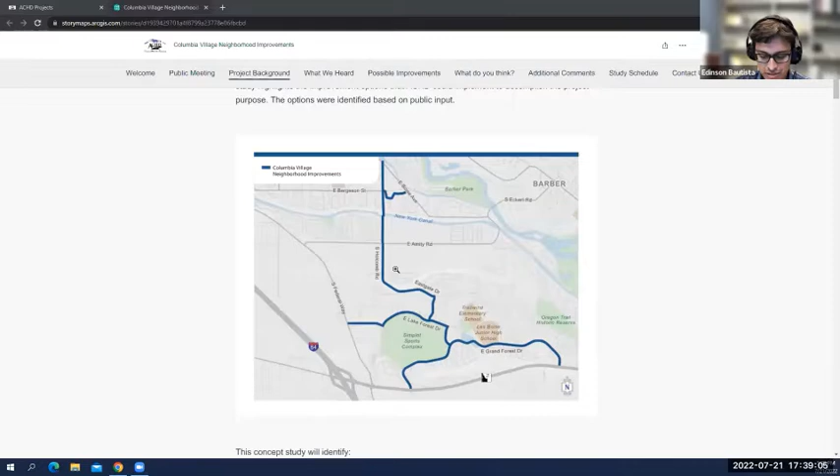Through this concept study, we seek to engage with the community through a robust public outreach to identify those bicycle and pedestrian needs and improvements that align with the neighborhood vision, as well as ACHD's continued effort to support the cycling and walking community and support them as a viable mode of transportation.

These improvements include, but are not limited to, sharrow lane markings, bike lane, sidewalk, curb ramps, pedestrian crossing, intersection improvements, and pathway improvements.

All these improvements will aim to emphasize the Holcomb and Columbia Village as a bicycle-friendly corridor, as well as meet Americans with Disabilities Act standards and current pedestrian standards. Overall, this is an effort to complete the bicycle and pedestrian network.

Scrolling a little bit down to the next section, entering into the what we heard from the community section. Here we present a summary of the first public outreach that we conducted for this project. This was done back in March 2022, and it was open for 2 weeks, in which we received a total of 321 comments from 92 participants.

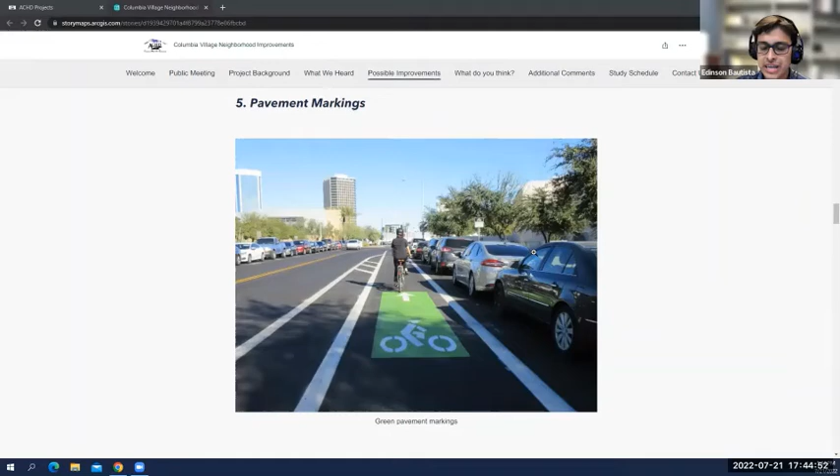The other improvement we're exploring through this concept study is additional pavement marking consideration. This includes components like green paint, shown in this image. That's something ACHD is exploring to implement more widely within Ada County.

And finally, entering into the shared use pathway. These are improvements to pathways that are outside the street. Typically they're 10 feet wide and allow mixed use by pedestrians and cyclists along the route. They're typically paved with asphalt or concrete, so that's something we're envisioning for this project as well.

And now jumping into the concept design for comments, I'll give the time to Brent to provide more details on what we're proposing and information regarding this concept study. I will stop sharing my screen now to give it to Brent.

Great, thank you, Edinson. Let me share my screen here. Okay, so the story map, if you're able to see this, but I'm going to navigate using a PDF, just helps me to be able to zoom in and out a little bit more.

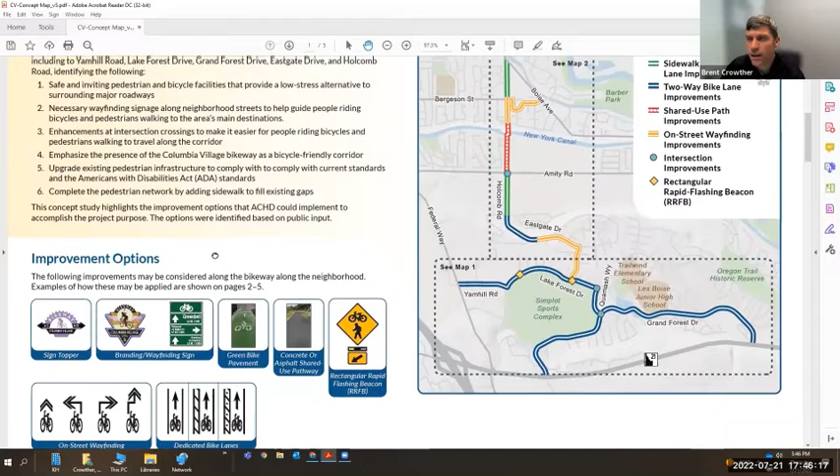Edinson reviewed some of the potential concepts being considered within the study limits. What we've done now is demonstrate with this very conceptual exhibit how those concepts would be applied to these roadways. You can see here on the right a map of the study area.

Then you can see the legend items: we have the green dash for sidewalk and bike lane improvements, a blue dash for two-way bike lane improvements, red for shared use path improvements, orange for on-street wayfinding, the blue dot for intersection improvements, and the yellow diamond for rectangular rapid flashing beacons. We've applied that beginning up here at the north at Boise Avenue.

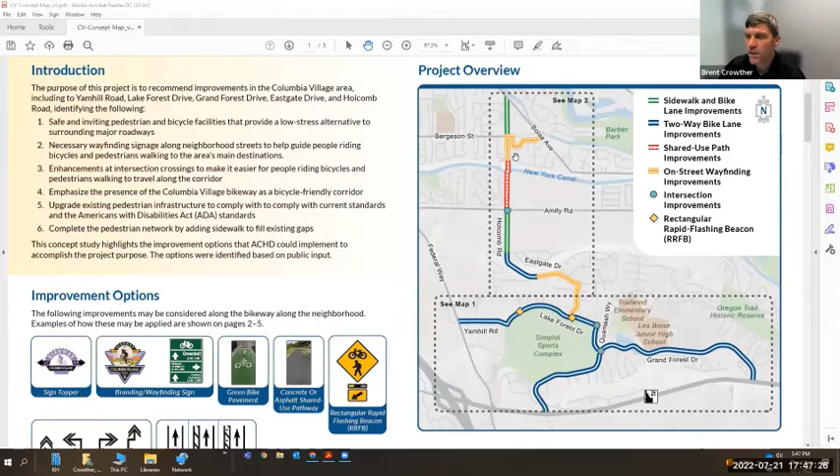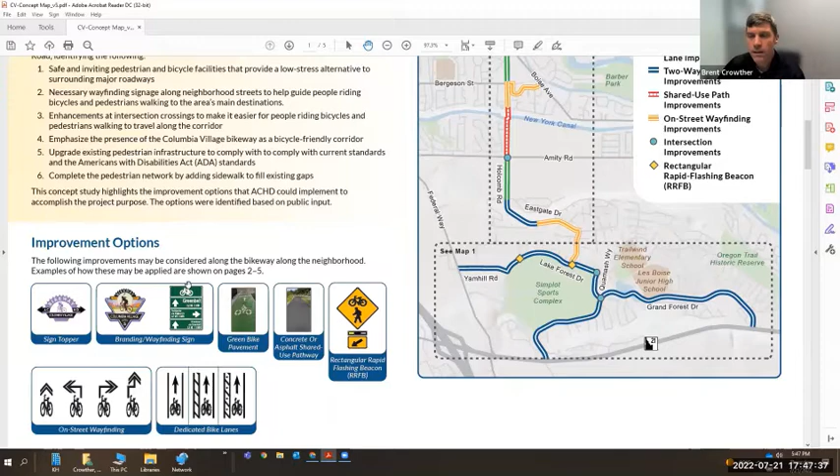We're proposing to improve the sidewalk currently so that we provide sidewalks on both sides of the street. Then in this area between Bergeson, connecting over to Boise, down to near the canal, we're proposing on-street wayfinding improvements. You can see an example of on-street wayfinding - signs like this with the branding, the green signs, as well as the sign toppers.

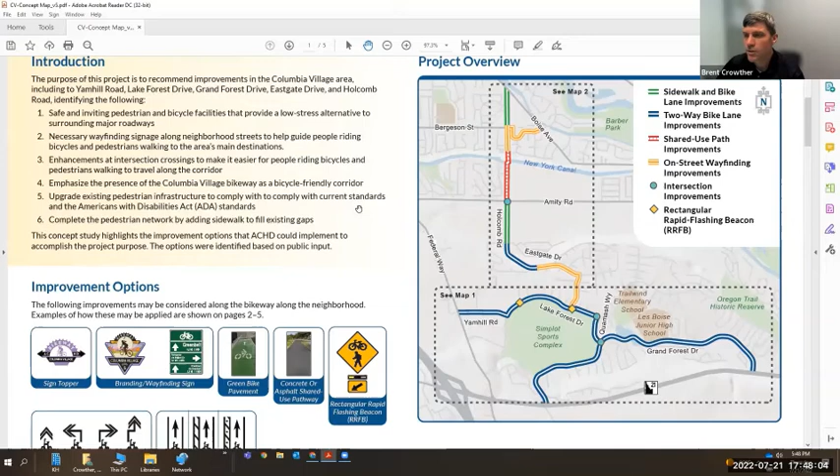As we extend further down, crossing the New York Canal down to Amity Road, we're proposing a shared use path. Again, we have sidewalk and bike lane improvements, two-way bike lane improvements, on-street wayfinding, and for the duration, two-way bike lane improvements. I'll show you on the next page a little bit more in depth of those improvements.

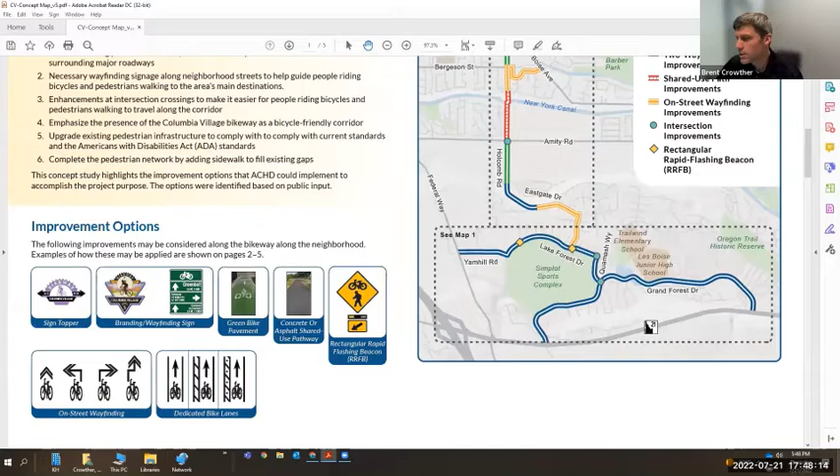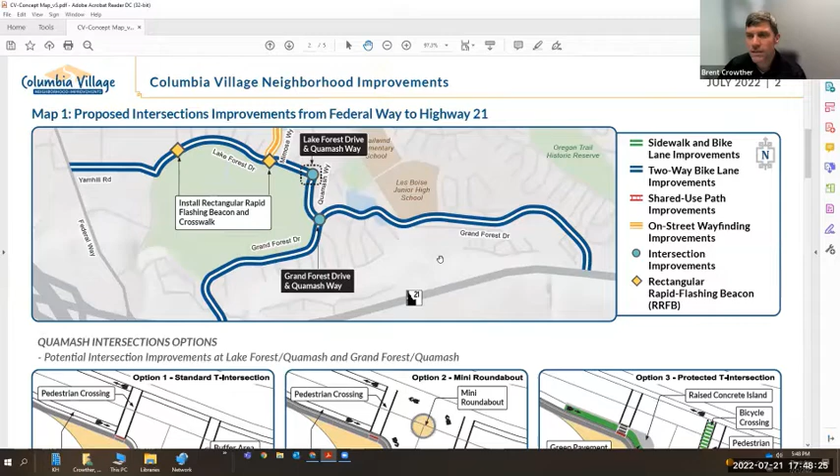It's hiding my... how do I get to the next page here? Okay, there we go. So the other four pages have inset maps that show a bit more detail on the specific type of improvements, and then a detailed exhibit for selected locations. Here, map number 1 shows improvements from Federal Way to Highway 21.

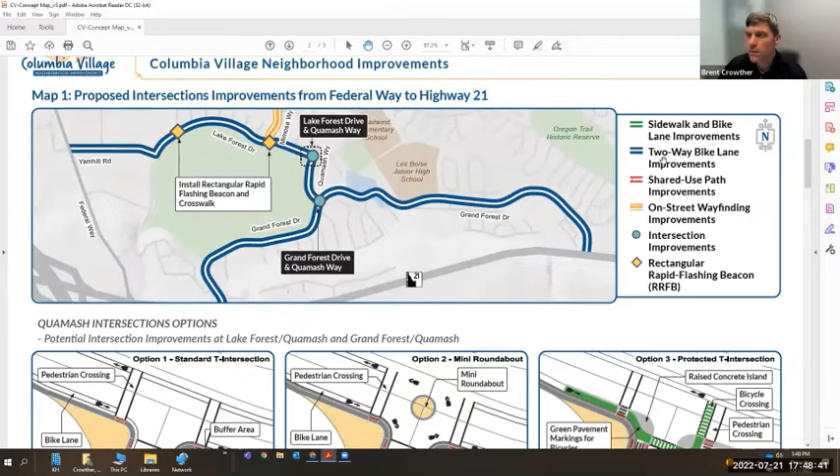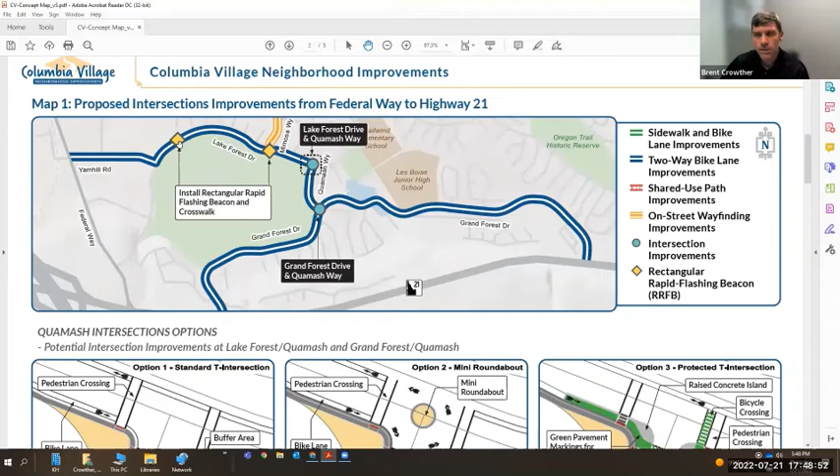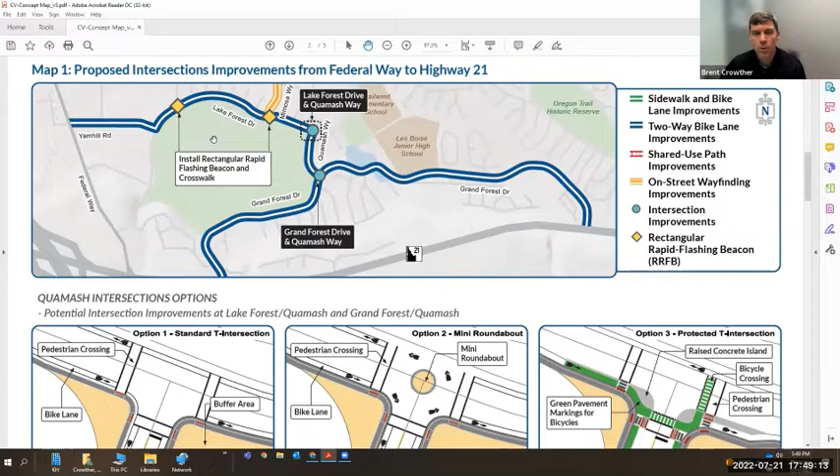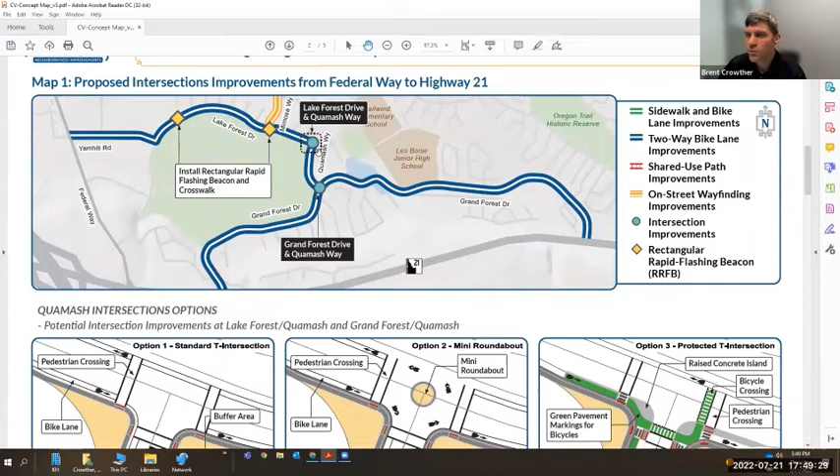Here at the intersection of Lake Forest Drive and Quamash Way, you can see we have intersection improvements. If we look down below, we have a couple of different concepts that can be considered, and we'd like your input on them.

Option 1 is a standard T intersection. We're proposing to modify the intersection to remove the large sweeping radius high-speed curves to more of a traditional T intersection. You can see we're implementing a buffer area to utilize some of that pavement so that we slow vehicles and better define the vehicle path, making a more defined location for pedestrian crossings. We'd have pedestrian crossings on all legs of the intersection, and bike lanes on all legs as well.

Option 2 in this location would be what we call a mini roundabout. That would direct vehicles and provide traffic calming, with vehicles circling around the roundabout to be able to make the movement to go left or right.

Again, showing the bike lanes with the buffer areas to use up some of that large pavement area. And the third option is what we call a protected T intersection.

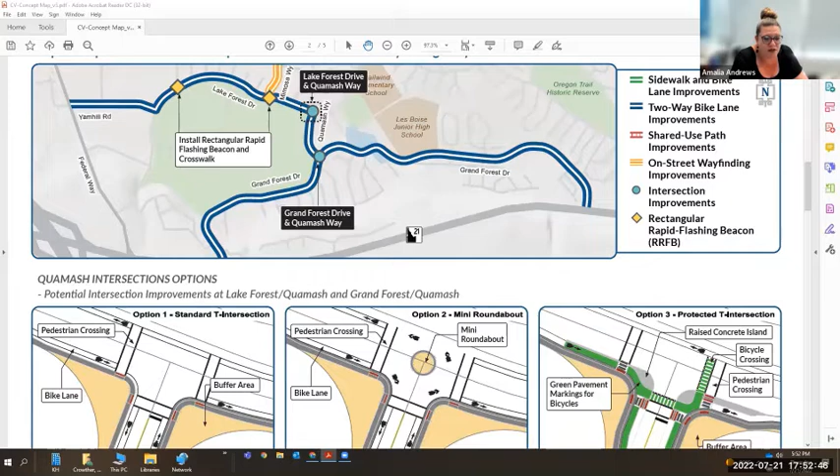Just one second and it should pop up on your screen. So I see that a poll has popped up on my screen and it's asking us a couple of questions pertaining to map 1. Which option would you prefer for Grand Forest Drive and Quamash Way intersection?

And then question 2 pertaining to this same poll is which option would you prefer for Lake Forest and Quamash intersection? Will you be sharing these poll results during the meeting?

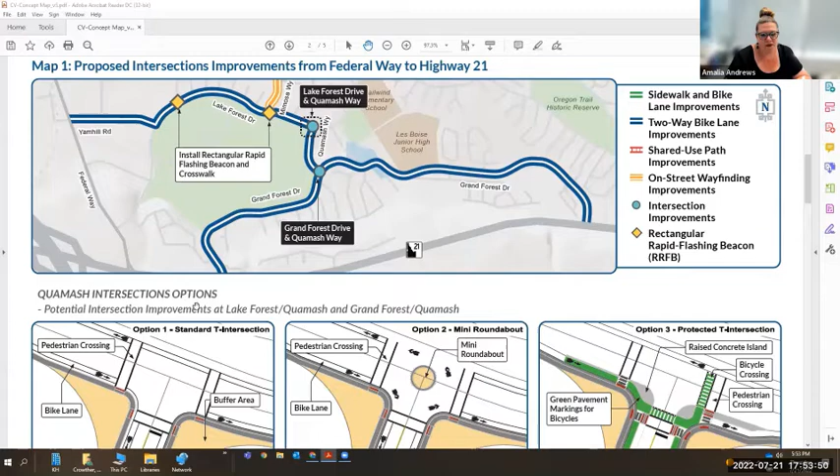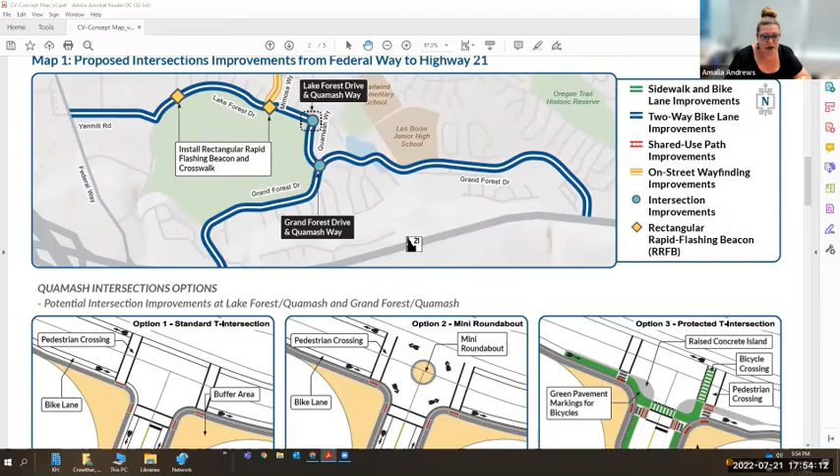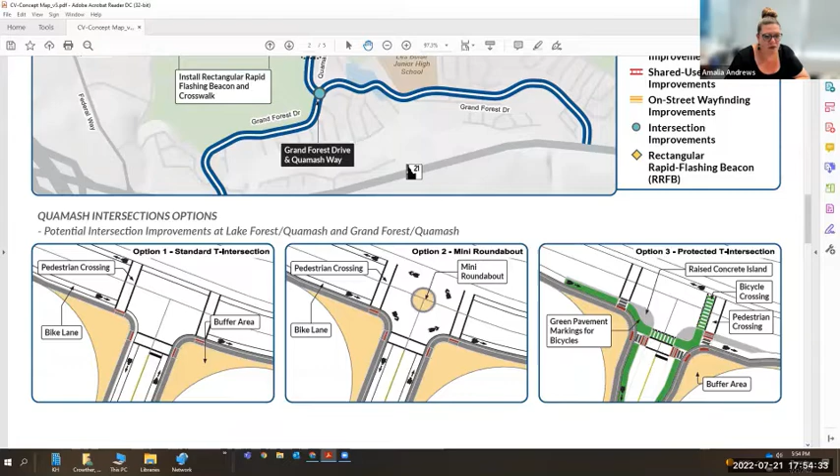Thank you, Brent. Okay, I think we can go ahead and move into map number 2. Map number 2 shows proposed bikeway and pedestrian improvements from Federal Way here on my left to Highway 21 here on my right. Through this section, it's the same section we saw in map 1, but showing a little bit more illustration on what the bike lane improvements may look like.

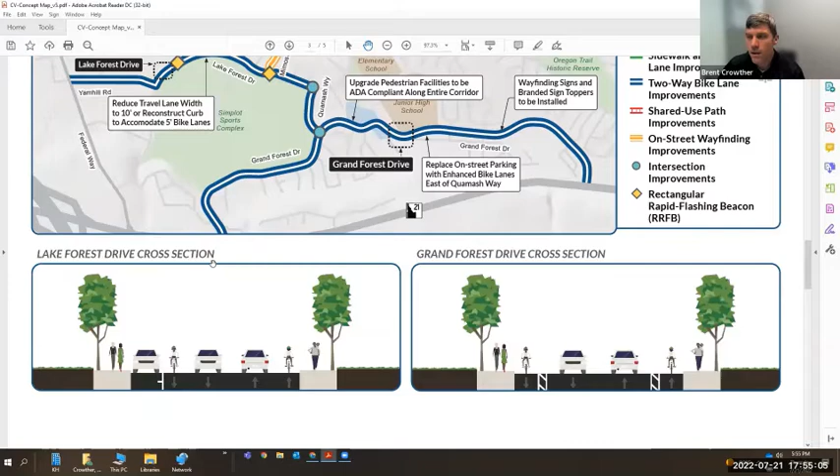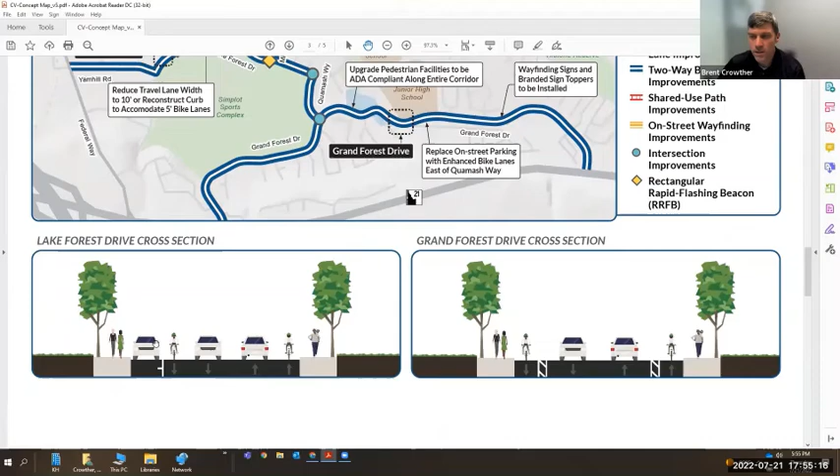You can see here the Lake Forest Drive section would have a bike lane on both sides of the road with a parking area on one side of the road. And that would be the Lake Forest Drive section along here where my mouse is.

The Grand Forest Drive cross section would have a bike lane on both sides of the road, separated by a buffer area, separating the travel lane from the bike lane. And that would be on both sides of Grand Forest Drive.

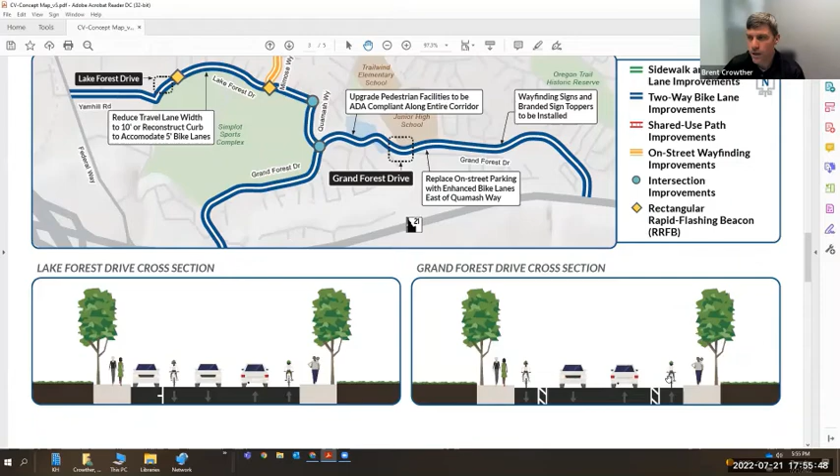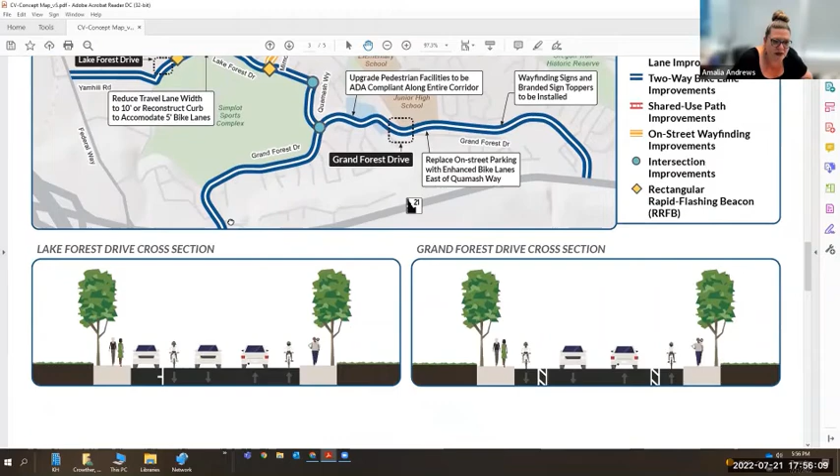Okay, so the polling question should have shown up on your screen for map 2. The first question is, do you like the proposed improvements for Lake Forest Drive between Yamhill Road and Quamash Way, yes or no? And question 2 regarding map 2: do you like the proposed improvements for Grand Forest Drive east of Quamash Way between Highway 21 and Quamash Way? We'll wait just a short time for you to answer yes or no to those two questions pertaining to map 2.

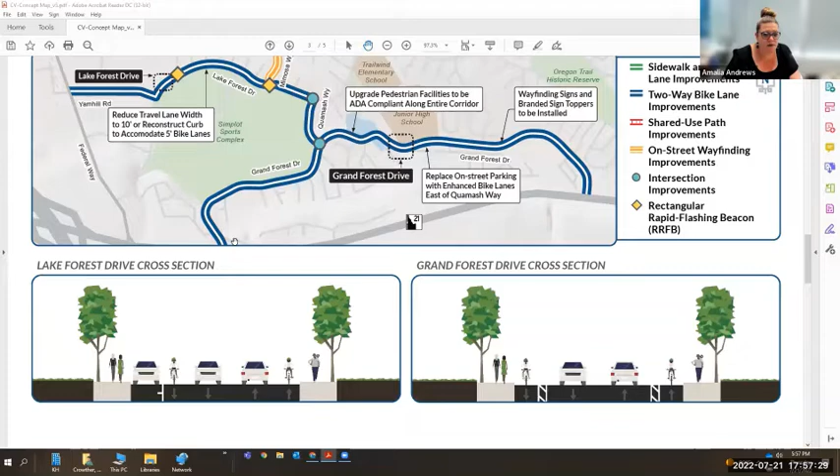It looks like most of you chose yes for both question 1 and question 2. There were a few no's, but mostly yeses on those two questions. All right, now we'll exit out of that and move into map 3.

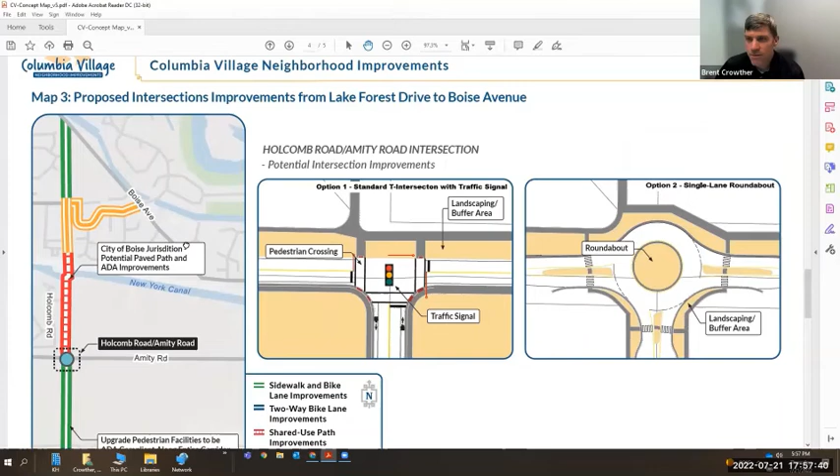Map 3 is showing the proposed intersection improvements from Lake Forest Drive to Boise Avenue, as you can see in this map on the left. We have a couple of options to get your input on here at the Holcomb Road, Amity Road intersection.

Option 1 is a standard T intersection with a traffic signal to facilitate crossing of Amity Road. You can see that illustrated here, where we'd have a traffic signal and the crosswalks.

Option 2 is to construct a roundabout at the intersection of Amity Road and Holcomb Road, as illustrated here on the right. That would be a single lane roundabout with landscaping and buffer area.

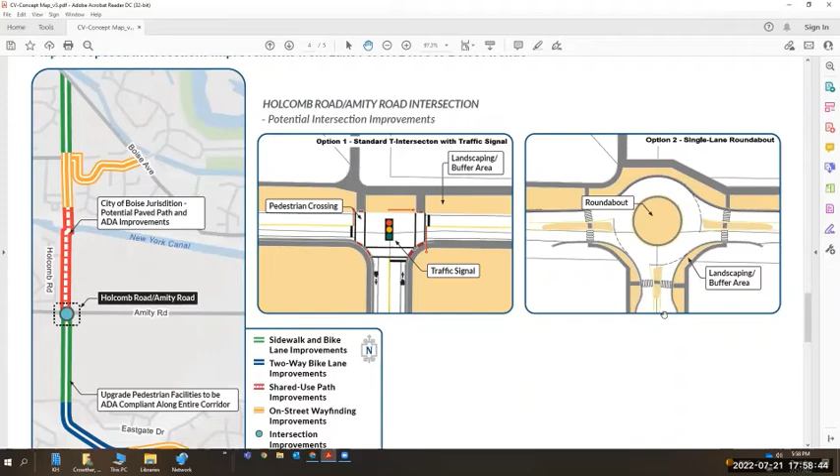A vehicle entering, if they wanted to make a left turn, would enter from the bottom, circle the roundabout, and then exit to the left. A vehicle wanting to go through from the left to the right would enter the roundabout, follow through, and continue on their way.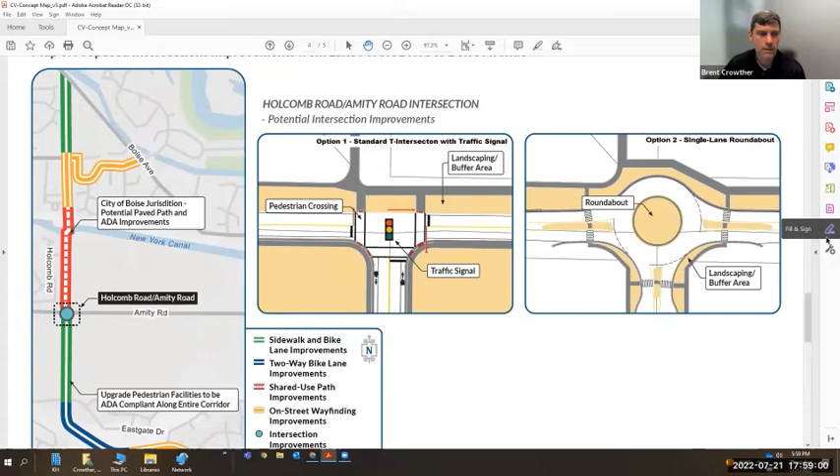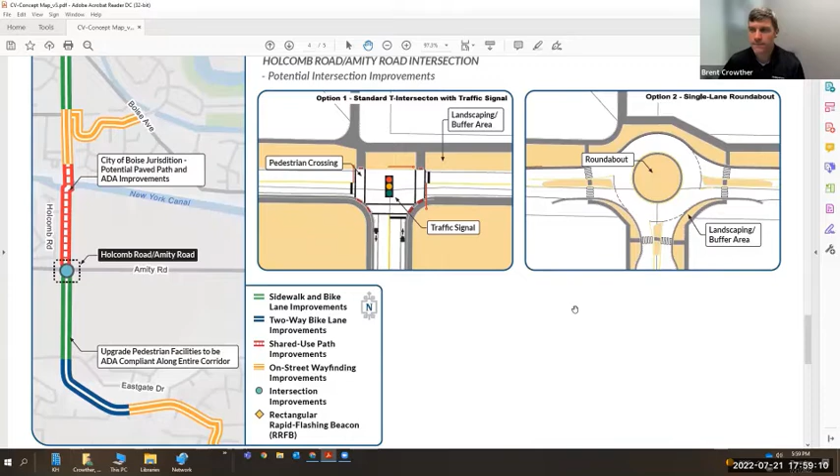For map 3, we have one question: which option would you prefer for the Holcomb Road and Amity Road intersection? Option 1, option 2, or I don't like any of these options.

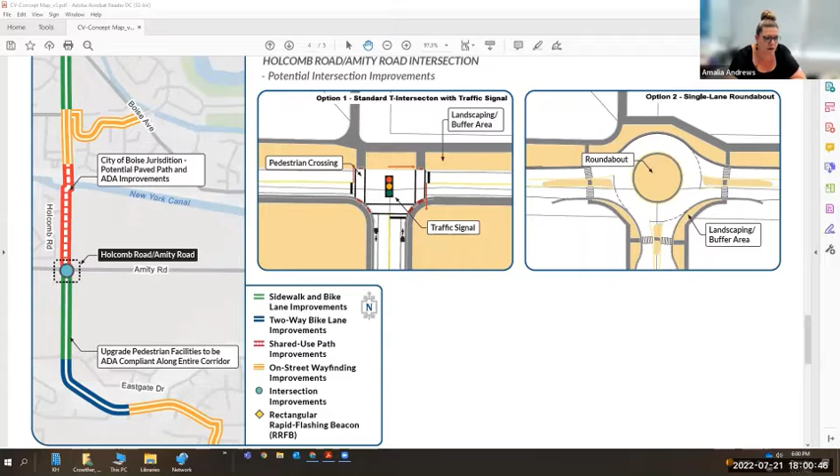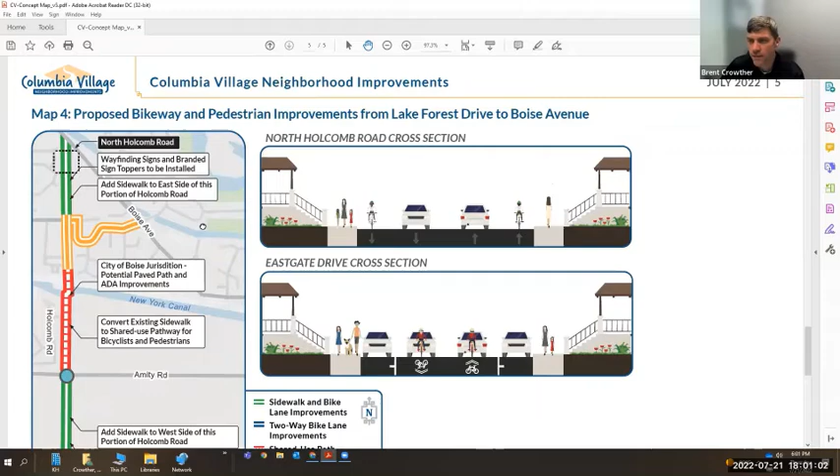Okay Brent, let's move on to the next map. Map number 4 shows the cross section of that same area for proposed bikeway and pedestrian improvements from Lake Forest Drive to Boise Avenue. In the North Holcomb Road cross section, in this area, we would have two travel lanes with bike lanes on both sides of the road.

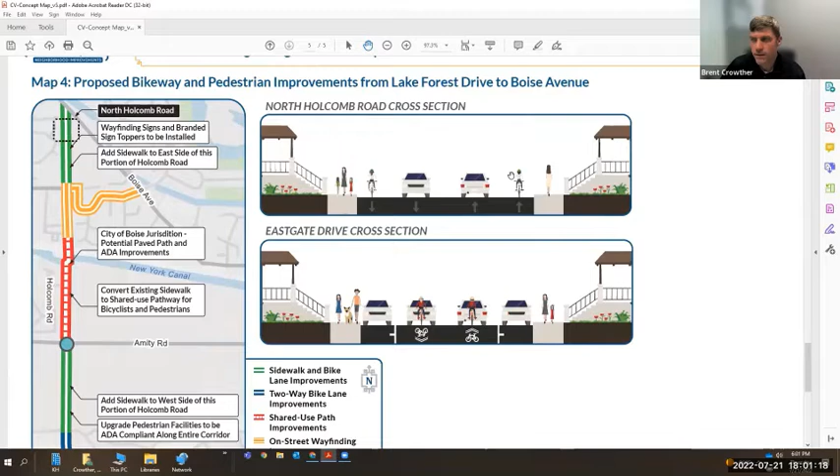For Eastgate Drive down here, because of the narrower cross section, we are suggesting what we call shared lane markings, which would be wayfinding adjacent to the on-street parking. Because of the narrower street width, there would not be room for dedicated bike lanes through this section.

Okay, are we ready to start the poll, Brent? Yes. For map 4, there are two questions. Do you like the proposed improvements for Holcomb Road from Boise Avenue to the New York Canal? Yes or no? And question 2, do you like the proposed improvements for Holcomb Road between Amity Road and Eastgate Drive? Yes or no?

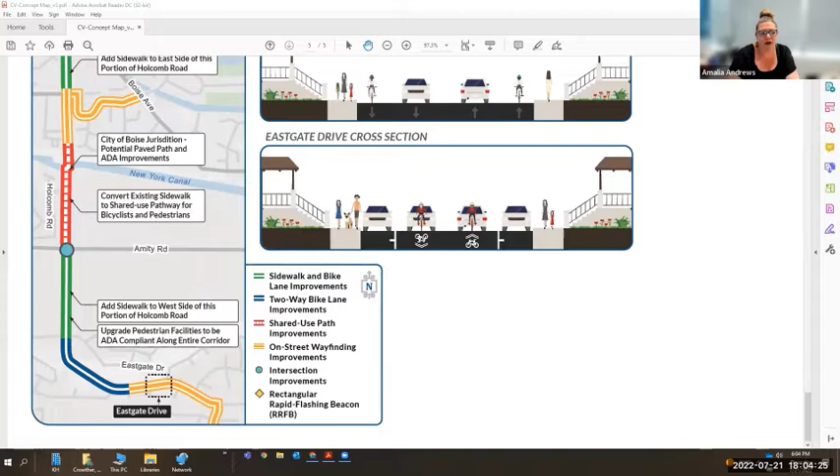Thank you very much for all of you participating. This is great, just answering those two questions.

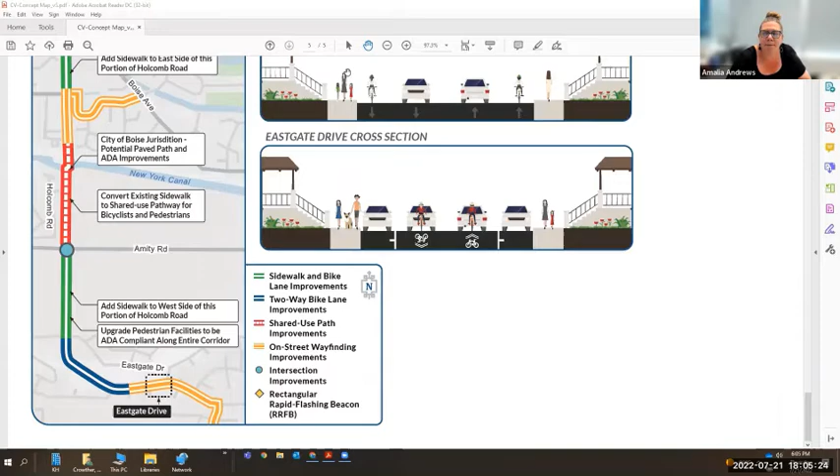And Edinson, did you have more details you wanted to share on the project website, or are we ready to move into questions? Yeah, let me start by sharing my screen once again, that way I can display this, the last part of the story map.

And then there's all the demographic and contact information that you can fill in, just to get even more information on the project in the future, or just to provide a public record for this project.

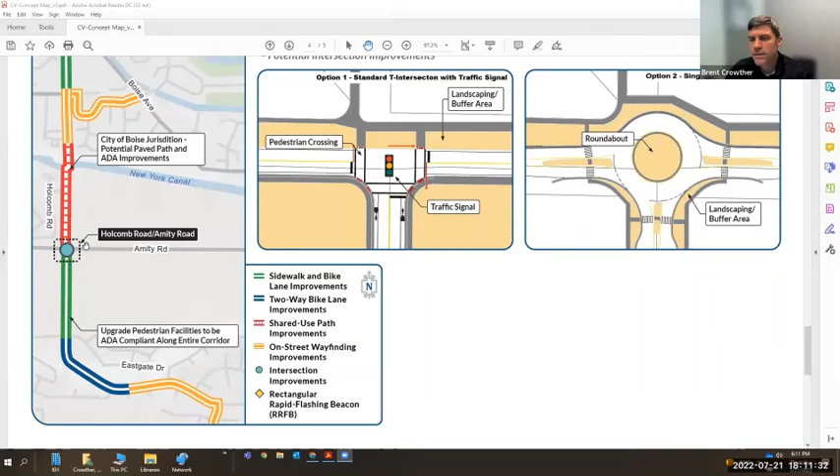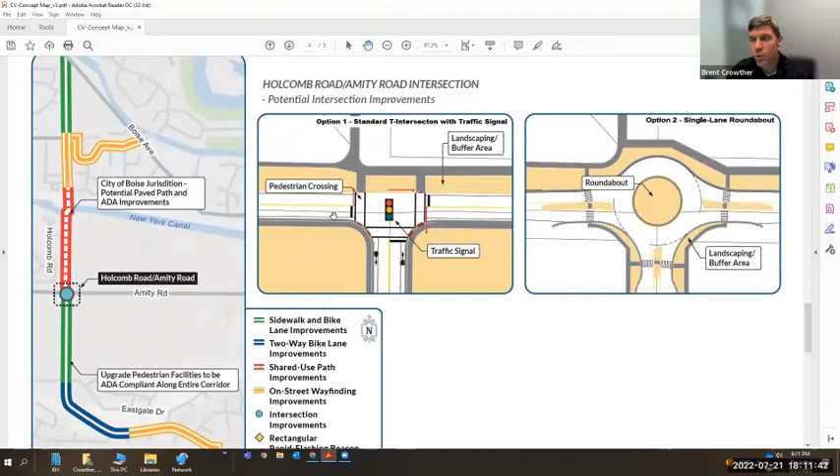Yes, I think as you mentioned, the question was submitted when we were talking about map 1. And then we got into it on map 3, where option 1 is a standard signalized intersection, and option 2 is a roundabout option. So do you think we answered the question, Linda? I see you shaking your head. Yes, that's okay, most helpful.

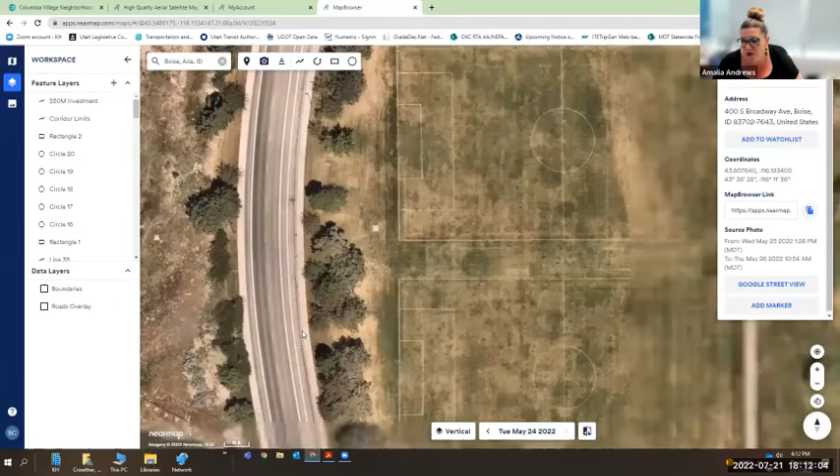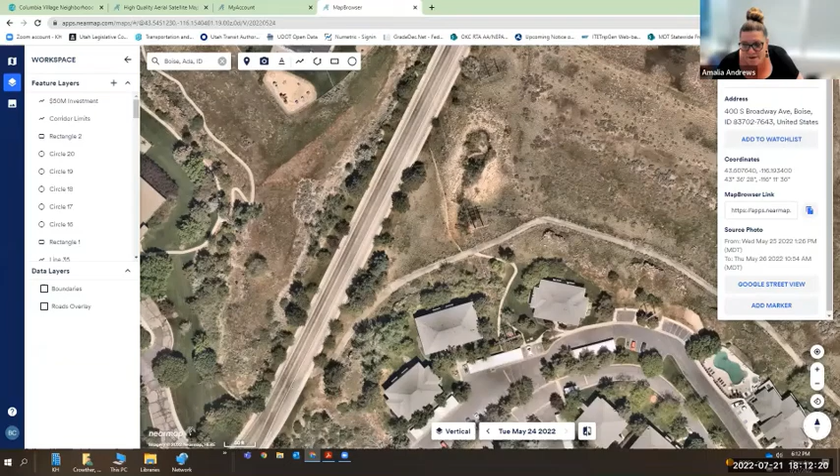Okay, great. Again, if any of our participants have a desire to ask a question verbally, you're more than welcome to do so, but I'm going to keep going through the questions in the chat. There's a concern from Philip about the Lake Forest section, regarding the amount of traffic the soccer fields get and folks parking along that street interfering with bike safety, such as when people open their car doors.

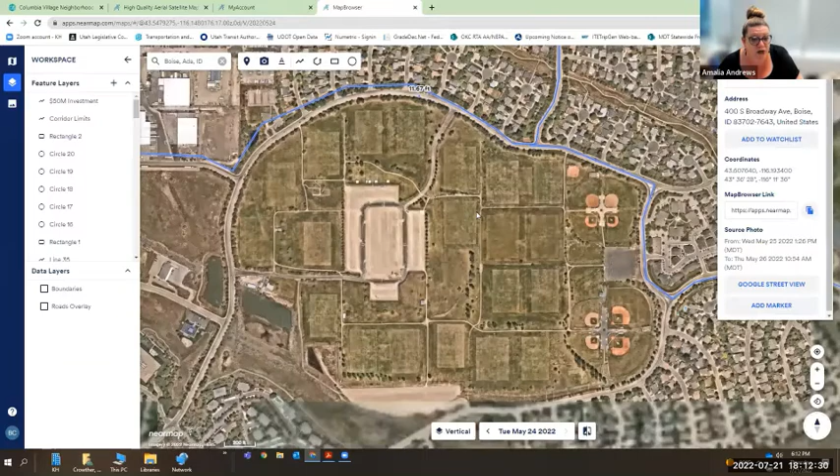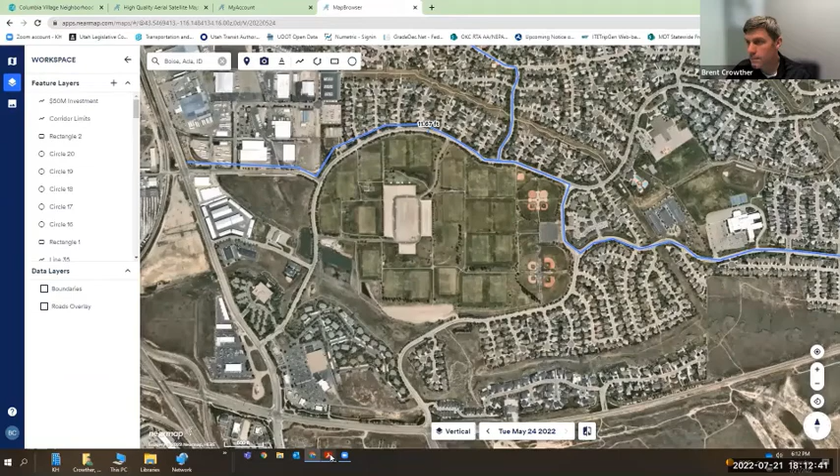Do you want to maybe pull up that area, Brent, near Lake Forest? Yes, so the soccer fields bring a lot of traffic in that area, so there's concern with that. I think we're talking about the north side. Philip, feel free to unmute your microphone if you'd like to share any more details.

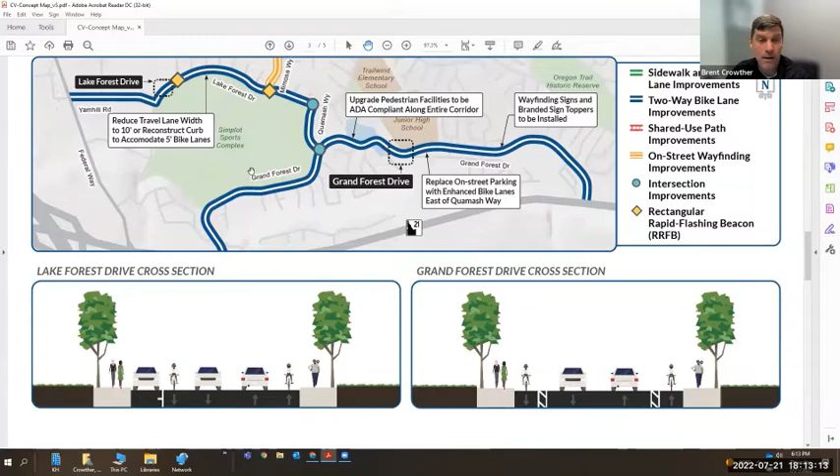Yeah, and we are recognizing that there is a big soccer draw, a field demand for parking. And that's why it's been suggested that we retain the parking and not remove it.

Yeah, hey, this is Phil. Thanks. Yeah, I don't know if there's any way to widen the street and make it diagonal pull-in parking, that might improve the situation, or I don't know how else to make it better. But currently, that cross-section drawing basically looks like what it currently is, and it just doesn't seem very safe when you're riding on that side of the street.

Are you specifically talking about Lake Forest, right? Yeah, you nailed the location. Yeah, and part of this, correct me Edinson if you want to clarify, but we've been trying to design the project within the current curb limits, so we don't end up in a full reconstruct type project, reconfiguring the space we do have. So we're trying to repurpose rather than reconstruct and widen the improvements, and that's why we haven't proposed any additional width there, but certainly noted.

We do have the bike lane. I think this is the cross section you're talking about, where we have the on-street parking on one side of the road, then the two drive lanes, and then the bike lane width. We are proposing a full width bike lane. Edinson, do you remember the dimensions on the bike lane? Was it a full 5? Yes, Brent, you're right. You're correct in all you say.

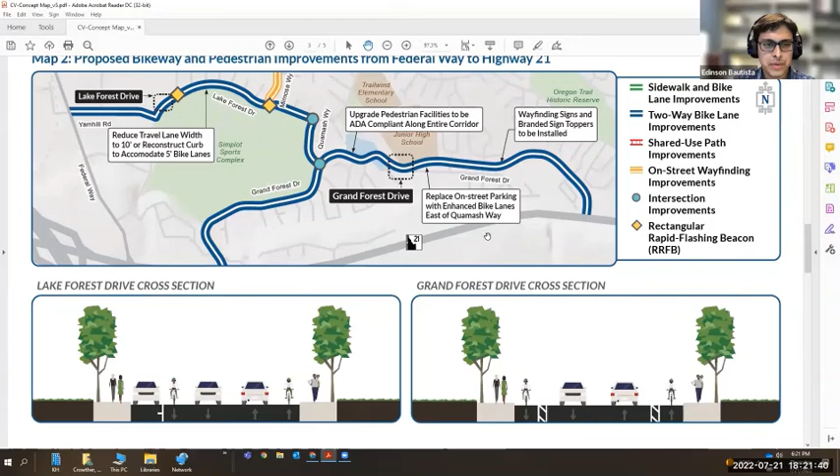Totally understood. At this moment that's not being evaluated as part of this project, but we saw a couple comments come in about that location that will be shared internally. It's just not part of this limit at this time. Now you're talking about this section here? Correct. Okay, got it. We'll be sure to make a note of that.

Linda, I'm going to move back to you. It looks like you had a comment in the chat about the trucks driving down Amity. Any further clarification you wanted to provide there? And don't forget to unmute.

Still a rookie at all this. No, you're doing great.

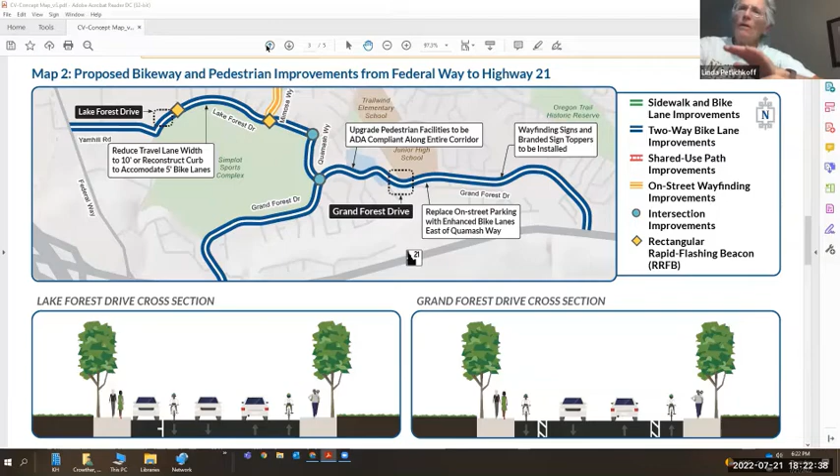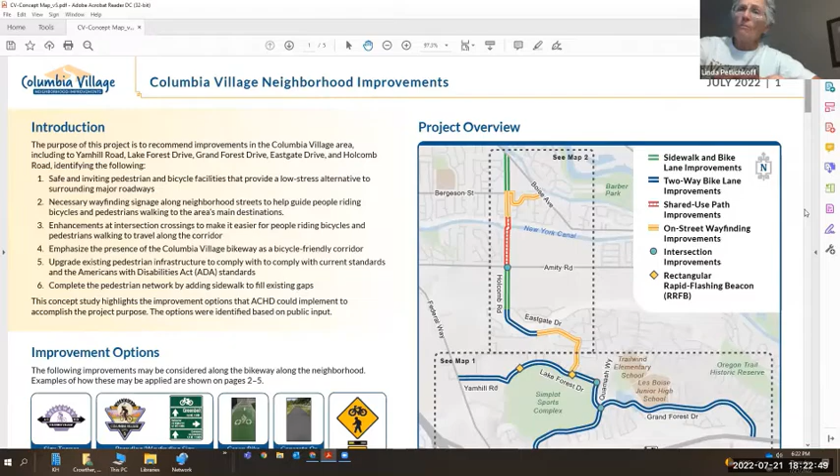I think the roundabout - I've talked to ACHD on several things up here in this area - I can't even imagine the roundabout there because there isn't a separate... South Holcomb ends at Amity. There is no driving on the other side of Amity, on the north side. So I think that's what that red line means, that there's no driving in that section. Or are you guys going to put something over the New York Canal, or are we just talking about the bike paths?

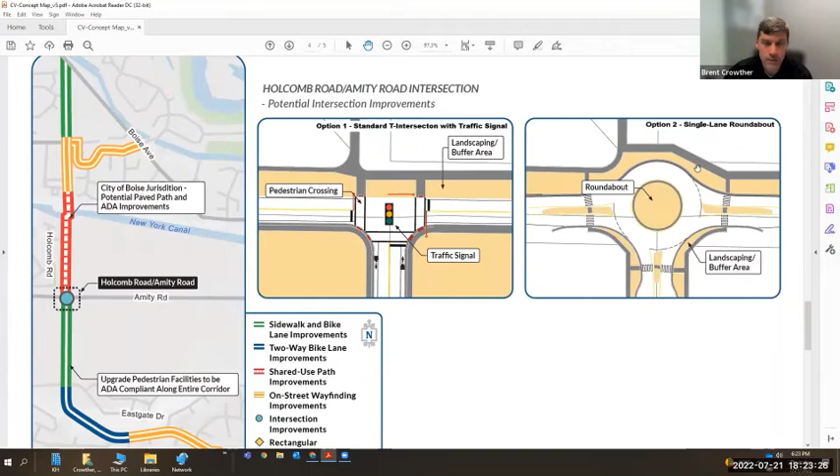You're talking about this section here? Yes. So we are proposing to make improvements - that's a shared use path for bicycles and pedestrians only, no vehicle traffic through there. I was just wondering how a roundabout works with only 3 roads coming in then. Yeah, we just have a 3-legged roundabout, there is no fourth leg.

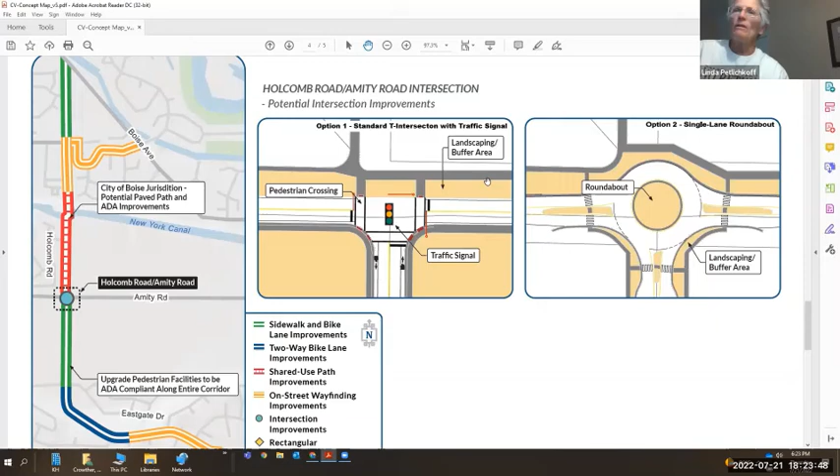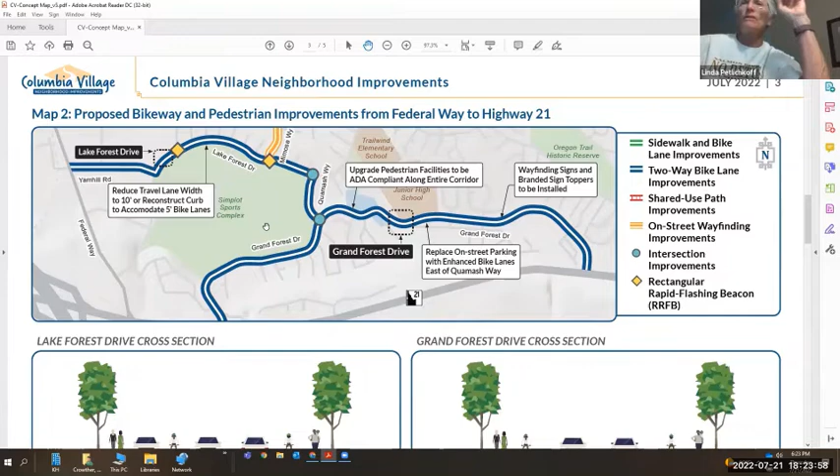I'd like to make a comment. We walk all around this neighborhood, and about the bike lane in the Lake Forest, Mimosa area - doors opening, kids can get hurt on bikes on that particular section. I can't remember if Edinson said the lanes are going to get wider, or if there would be a buffer, not physical, but some sort of wider bike path that would allow cyclists to move more toward the street side. That might help there, but I don't know, you guys are the experts.

Those are great comments, Linda, we'll make a note of those. Any further comments from Edinson or Brent on that, or should we move on? Just to clarify, Edinson is suggesting, as explained before, widening the bike lane that's there now and reducing the travel lane widths to expand the space available for bicyclists. I'm not clear on your suggestion about moving - can you clarify your other proposal?

Are you talking to me? Yes, Linda. So what I was trying to say is, if the bike lane gets bigger, there's a little more space to work with for doors opening and everything. And if you can figure out some way to not let drivers pass you on the right when you're trying to make a left at Mimosa, that would be a wonderful idea.

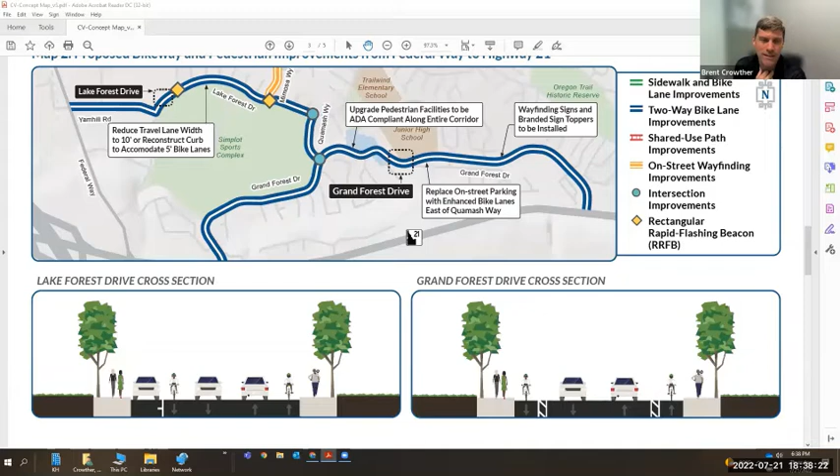Thank you. Am I able to say anything? Please go ahead. The thing about the crosswalks, I don't want anyone thinking I'm against them. It's just that when I looked at the maps during the survey, you already have a crosswalk with a flashing light down by Trailwind. Then there's a proposal to put one in front of the rec center, which is only about, I don't know, maybe 100 yards down. So now you have another potential stop.

And then you have a curve coming down from Quamash on Lake Forest that if that backs up — I'm thinking more around the fall when the kids are coming out of school, so not all the time, but usually around the school period — and then you're having yet another crosswalk at Quamash, maybe another 100 yards, and finally another one over on Mimosa. The one good thing is it'll slow down traffic, but usually when you have something like that — and I've been in this neighborhood since '97 — it just seems to get people stepping on the gas and going faster than the posted speed limit.

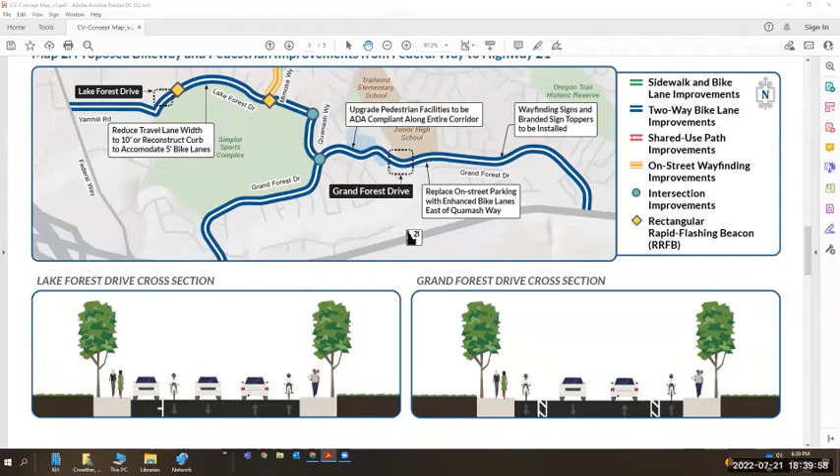And I just think there's a potential for problems, and I'm wondering how you guys propose to address that when you look through it. Brent or Edinson?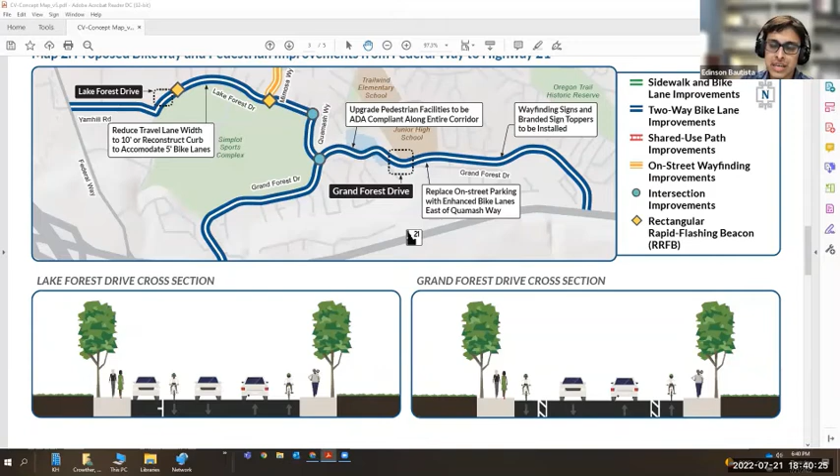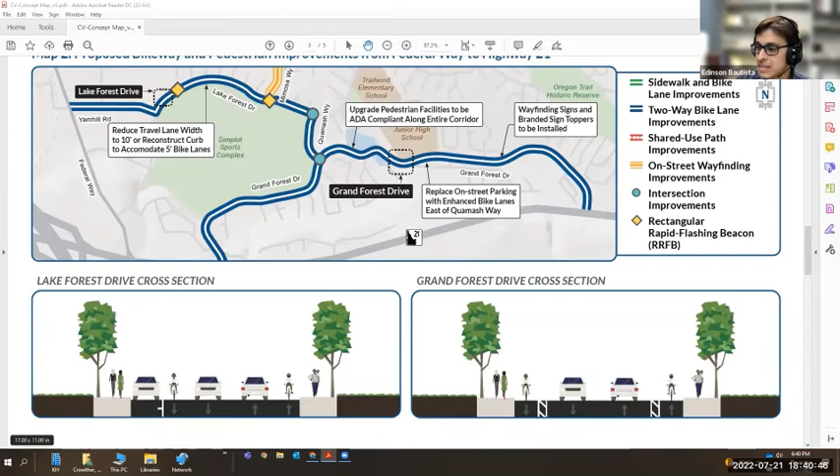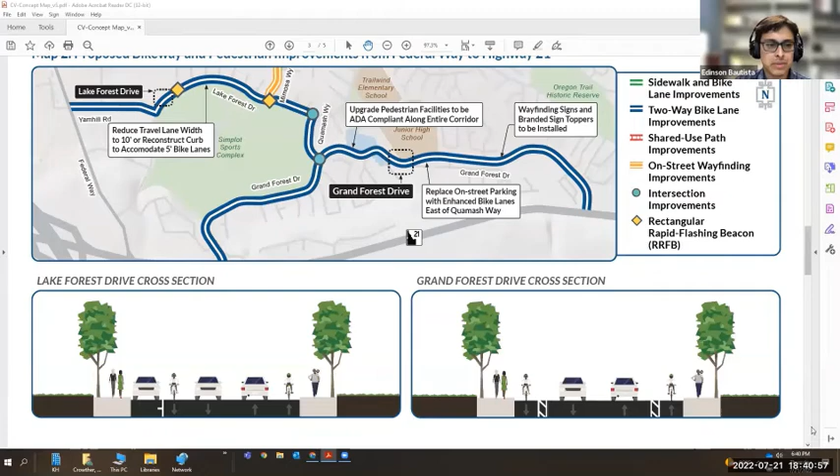Yeah, certainly, and great point. I think that's something to take into account as we start looking at a lot of the smart crossings or RRFBs. There's a lot to take into consideration, especially when we talk about compliance, about how traffic reacts to those crossings. We heard from the community the need for crossings along Lake Forest, and that's why we're considering a lot of these locations. Our traffic team is taking a closer look to make sure the locations we're recommending align with the compliance and distance needed, so those aren't violated in the future by vehicles. So great point, and we're taking a closer look, especially at the proximity between each crosswalk.

Okay, and then really quick on the storm drain: when you guys put in the sidewalk on Holcomb on the east side, down to that intersection, every time we get rain or the snow melts, that whole area gets flooded, which also comes up onto the sidewalk used by bikers and pedestrians. Okay, we'll be sure and make a note of that too. Thank you very much.

Thank you. Okay, I'm going to move on to Vern's comment, or actually question, in the chat: what about adding a bike pedestrian path between the Amity and Holcomb intersection up to Federal Way?

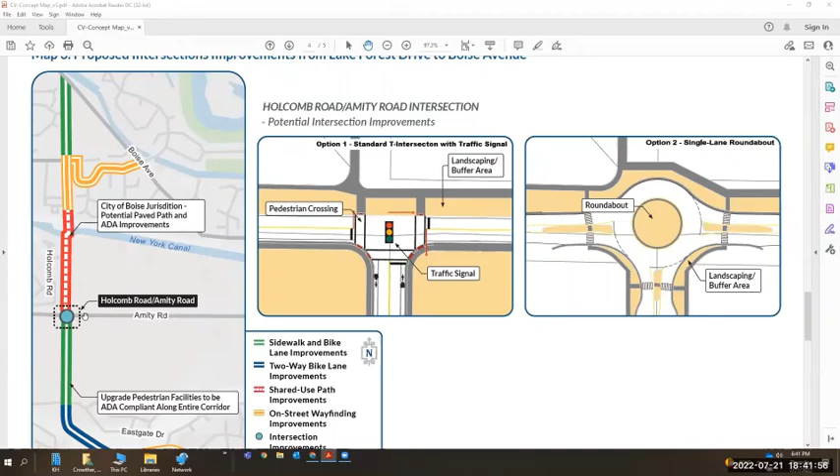This is Vern, can you guys hear me? Yes. Yeah, my thought there is that people are walking and riding bikes up that road all the time. As it necks up toward Federal Way, there's hardly any shoulder, and people walk right on the edge. I think as part of this plan, it would be really helpful to provide a path for pedestrians and bikes to get up to Federal Way.

There's no public transportation up here, so people have to walk to the Bergeson Federal Way bus stop or over to Fred Meyer's to catch a bus, and even then just people walking up to Home Depot or Maverik or wherever — there's no path there, but people are on that road and it's way too thin. They're on the shoulder, and there's been times in the morning in particular where I can't believe people aren't getting hit, bikers that are on that edge.

And so anyway, just a thought that I think it'd be a big safety improvement to that section if we could get something in there. And I know it's tight, it's really tight in there. But anyway, just a suggestion to improve safety.

I'm going to move on to another comment in the chat from iPage. Will the Z Trail at Holcomb be paved? What is the plan there? Yes, sorry Brent, and yes, the plan at the pathway is to pave the path. In addition, look into accessibility improvements to make sure pedestrians and cyclists are able to use it without any major issues.

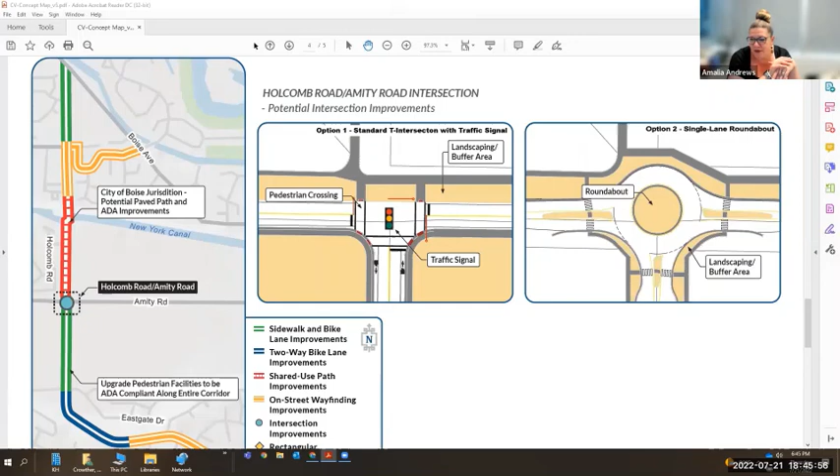From Travis, Linda, to answer what I think you may have been referring to, how does option 1 differ from what is already there? The standard T option eliminates the curved car lane and makes it a 90-degree turn on Quamash and Lake Forest. So that area in the tan on both sides that they identify as buffer area are current turn lanes, but they are proposing to take those away. If I could add a snapshot here, I would show it. I don't know if Brent, you want to clarify, it seems like you're nodding your head.

Yeah, and if you go to the next comment, oh yeah, she clarifies, Travis was referring to the standard T at Holcomb and Amity. So the difference here is there is currently a pedestrian hybrid beacon, and this would be improved to a full traffic signal here at the intersection of Amity and Holcomb.

Thank you. So we did receive a comment from Philip: thanks for the info, please consider widening the road north of the soccer field on Lake Forest to accommodate the parking and new bike lanes. So we'll make a note of that comment.

And Michelle is agreeing with Vern. Thank you, Michelle. And lastly, from iPage, I also agree 100% with Vern about the bike path on Amity to Federal Way. Someone is going to be killed if something isn't done. So we're definitely going to make a note of that comment.